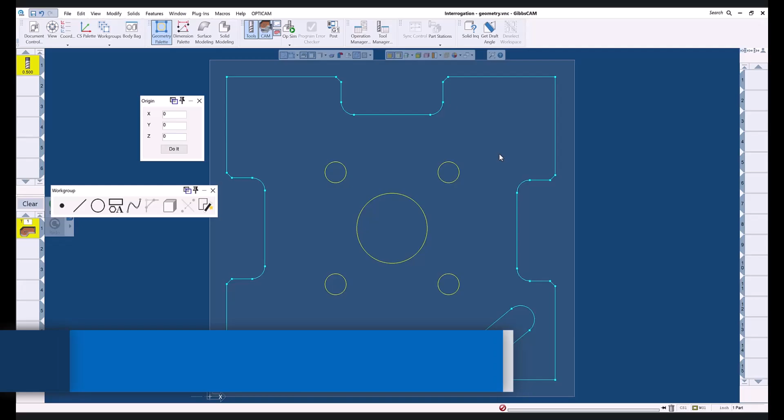In this video, we'll take a look at the interrogation cursors and explore how they can help streamline your programming by automatically filling in data fields rather than manually identifying or calculating the data. This helps to smooth out your workflow, which I believe not only speeds up the process, it helps to reduce the opportunity for mistakes. Interrogation, in this case, simply means asking for information.

We're asking the software to provide the location or other information about an object. There are two interrogation modes in GibbsCAM. The first interrogation mode returns a single value, and to use it, I make sure the appropriate field is active and hold down the Alt key while I click on the object that I'm interrogating. GibbsCAM returns that object's correct value for the selected field.

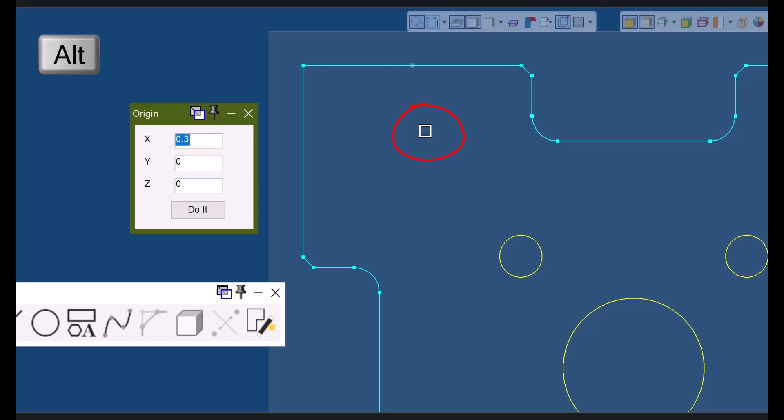Notice that when I press the Alt key, my cursor changes from an arrow to a box. This lets me know that I'm in interrogation mode, and the box is called the interrogation cursor. Using this mode, I can interrogate a point for its X, or its Y, or its Z location. By the way, I'm using the Move Part Origin window simply because it's one of the dialogues that has X, Y, and Z fields. The things I'm showing you work in other dialogues as well.

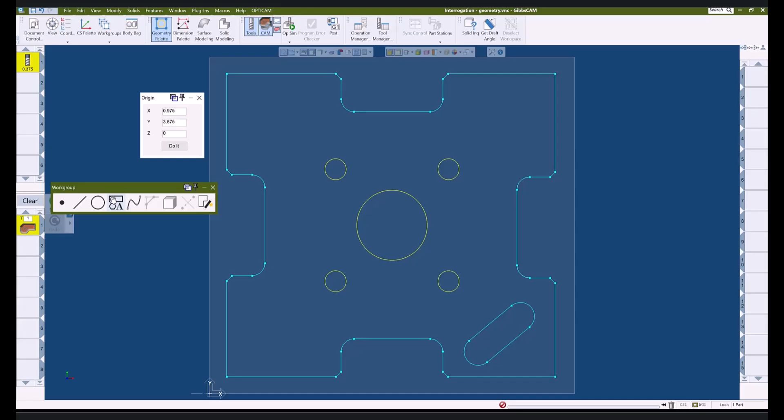I can interrogate a circle for the X or the Y or the Z location of its center point. Or I can interrogate for its radius if a radius field is active. Or its diameter if a diameter field is active. Speaking of diameter, the only diameter field I can think of in GibbsCAM is the tool diameter field. I can also interrogate a line for its angle, or for the lowest X, Y, or Z point on the line.

As of GibbsCAM version 24, the software provides virtual points, which give me other options for interrogation and dimensioning. Notice that with the Alt key pressed, as I move over either geometry or the stock outline, these virtual points appear, getting brighter as the cursor gets closer. These give me the ability to interrogate or dimension to these virtual points.

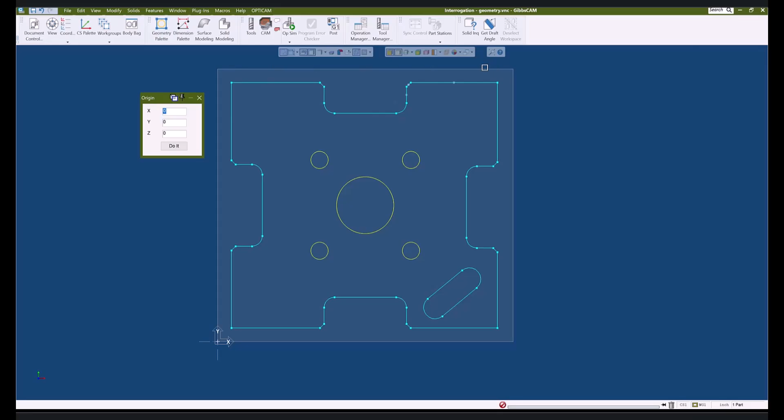Using virtual points, I can interrogate not only the center location of a circle, but the quadrant points. Not only the ends of a line, but the center point. And the corners or midpoints of the edges of my stock outline. Let's take a look at this model for a minute.

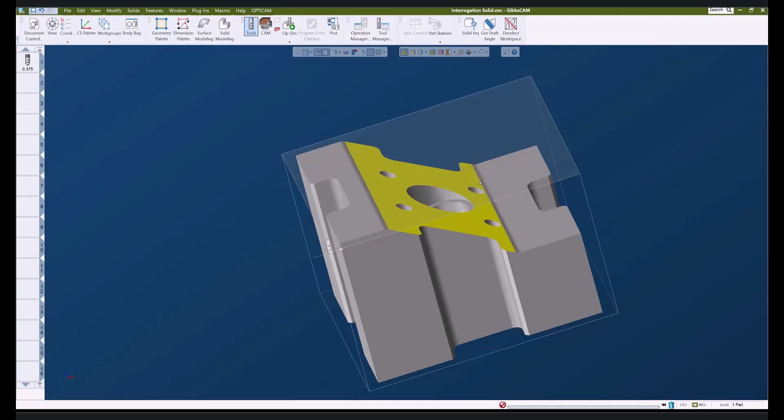We've always been able to interrogate the faces of a model. In all but 3 cases, interrogating the face of a model will give you the lowest point on that face in the axis that you're interrogating. I'll get to those 3 exceptions in just a minute. I'll open the Move Part Origin dialog again just to give us X, Y, and Z fields to work with.

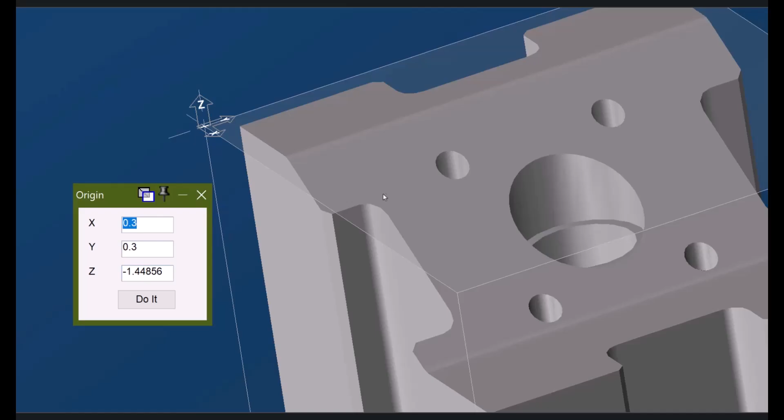With the Z field active, if I Alt-click on the face of this hole, I get minus 4 inches returned, since the hole goes all the way through this 4-inch thick block. If I Alt-click this face, I get negative 1.448 and some change, since the lowest point on this face is here at this shoulder. If I activate an X field and Alt-click on this face, I get the lowest X value on this face, which would be along this edge.

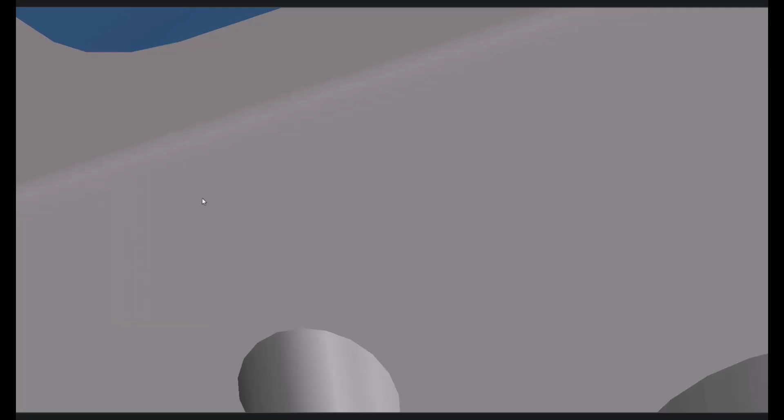I mentioned that there are 3 exceptions to interrogating a face returning the lowest value for the axis that you're interrogating. Those 3 exceptions are found in the process dialog. This field that is commonly called the top of the part field, as well as the entry and exit clearance fields, will return the highest point of the face that you're interrogating in the depth axis of the machining coordinate system. So, Alt-clicking this face with the top of the part field active returns the highest Z value on this face, while Alt-clicking the same face with my cutting depth field active returns the lowest Z value on this face.

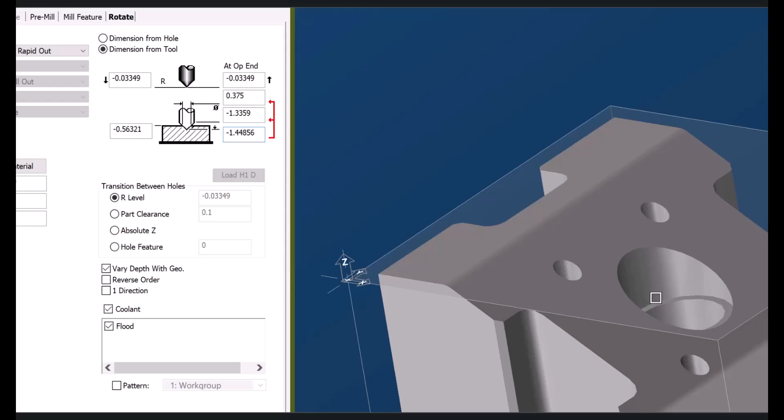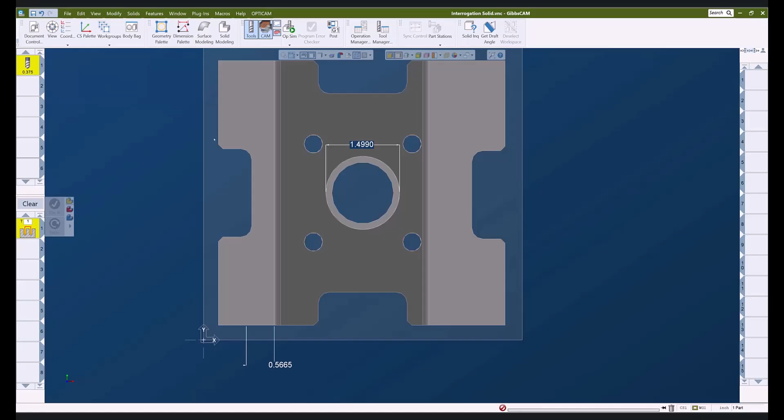As I mentioned, we have virtual points on the edges of the faces, and these can be interrogated just like normal geometric points. For that matter, they can also be dimensioned directly, rather than having to create or extract geometry. So we can use many of our dimensioning tools directly on solid models by using these virtual points. I'll put a couple of dimensions on this model using virtual points. So we have dimensioned directly on the solid, something that previously we would have needed to have extracted or created geometry to do.

The second interrogation mode is accessed by holding down the Shift key along with the Alt key. This interrogation mode returns the entire XYZ data set at one time. If I want to move my part origin to this corner, for example, I simply make certain that either the X, Y, or Z field is active in my Move Part Origin dialog, then hold down Shift and Alt while I click on the virtual point on this corner. I can use any other point, virtual or geometric, or any circle to fill in the X, Y, Z fields in most any window that provides those fields.

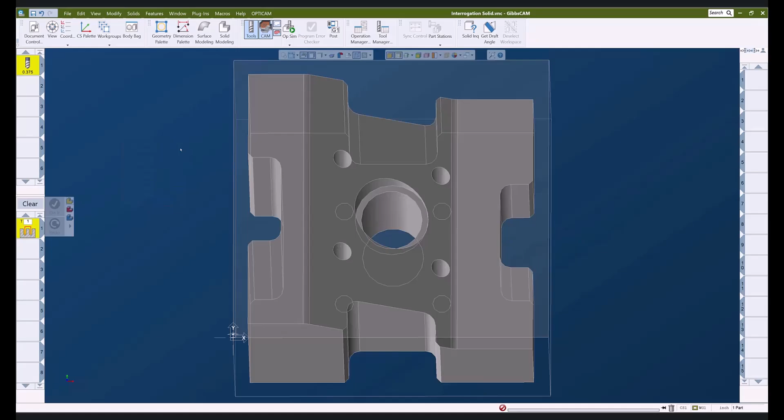We've looked at the two interrogation cursor modes and how to use them on geometry and solids, as well as using the new virtual points both for interrogation and dimensioning.